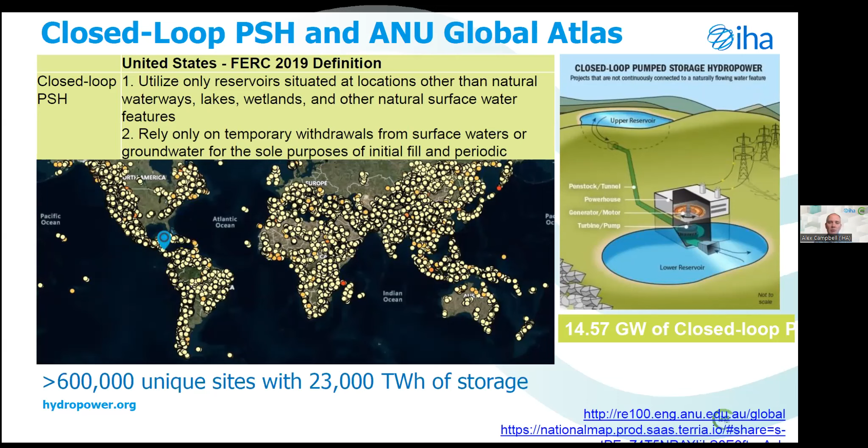Now, of course, in reality, not all of those sites would be viable, but it gives you a sense of the scale and the potential that is out there. And of course, pumped storage today is one of the most significant forms of storage on electricity grids, by our estimates over 90% at the moment. So it really goes to show that there is tremendous potential out there. Next slide, please, Rebecca.

We've got a pumped storage tracker tool on our website. If you're interested, you can go and look at most of the sites that are in operation and many that are under construction. That's easily searchable on our website, so please do go and take a look. We're on the brink of updating that as well to include some national policies information, but the tool is live and available at the moment in its current version. Next slide, please, Rebecca.

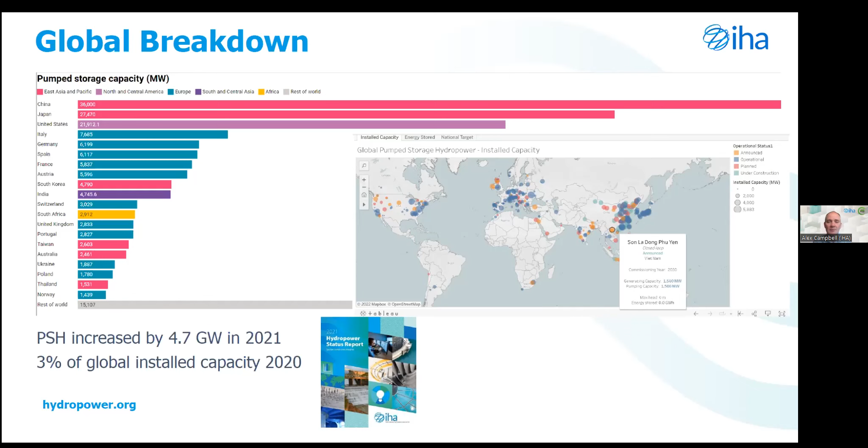So again, hopefully for most of you, this particular aspect won't be news. Electricity systems are changing around the world, and what we're seeing is a huge shift away from the generation like coal and gas, which is reliable. We know when it's going to happen. In the case of gas, it's super flexible. Coal, a bit less flexible, but you know when it's going to be on, and you can plan your electricity system accordingly. Of course, with net zero, with the imperative of climate change, we have to move away from that.

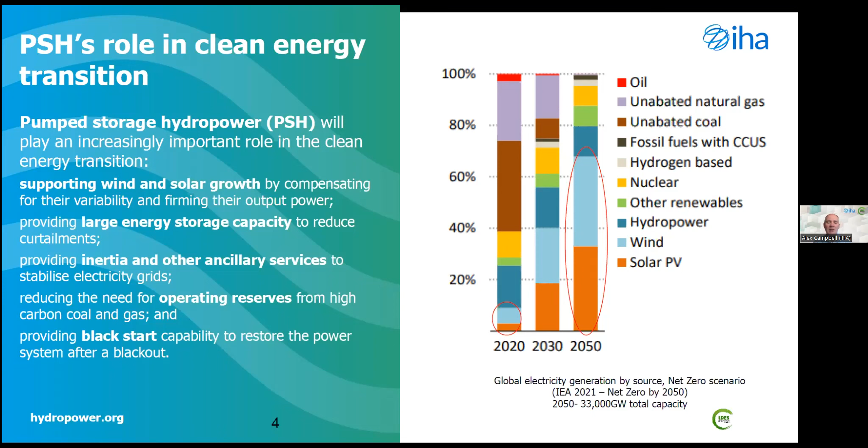So we need that system flexibility to make sure that the lights stay on, and indeed that electricity keeps flowing, and that we're not polluting the atmosphere with yet more carbon. Again, hopefully none of that is news to you guys. It's just a useful reminder of the sheer scale that we're having to deal with. Next slide, please, Rebecca.

So a question that we're often asked is, well, if there's obviously a compelling need, and if pumped storage has been around for a long time, why isn't it being built more at scale? So to answer that question, we brought together a wide range of stakeholders a couple of years ago to form the International Forum on Pumped Storage Hydropower. 80 plus stakeholders, government-led, IHA provided the secretariat, huge number of partners.

And we've themed our work around 3 key working groups: markets and policies, sustainability, and then capabilities, costs, and innovation. And we've got leads from all of those groups actually on the call later on today on the panel discussion. And I'll give a quick summary now of the headline findings from some of those groups.

So firstly, from policy and market frameworks, many of these findings will be applicable, of course, to other forms of technology too. So some of the key headlines there will include: make sure that you plan for your storage and flexibility needs now. We don't want to be in a position in 10, 20 years time where we've rolled out wind and solar at scale and then suddenly find it's difficult to keep the lights on without resorting to gas, for example.

And then I guess really crucially, the one that I always like to point to is we've got to make sure that services are remunerated, which quite often isn't the case, believe it or not. So not for electricity generation, but for some of those ancillary grid services. And many markets around the world still don't pay for them, reflecting the legacy infrastructure, as it were. But then also you've got to give long-term price visibility to investors.

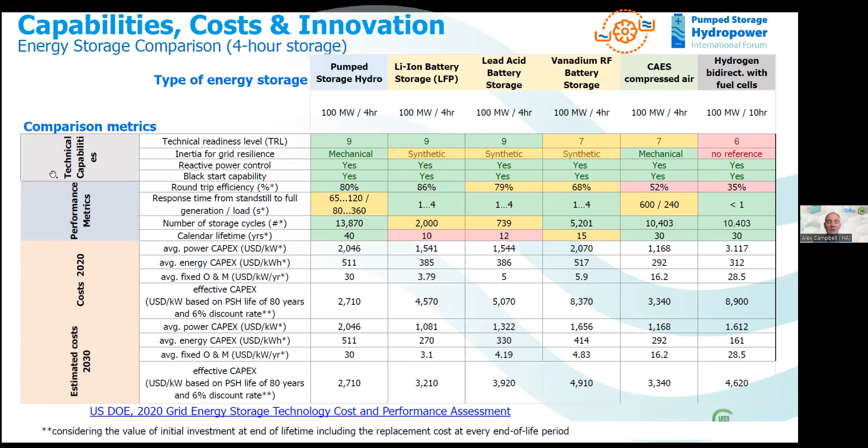And then I think this is the last one from me before handing over. Just a pointer to the XFlex Hydro initiative. So this is a European Union funded project. It's got a number of demonstrator projects, mostly pumped storage. There is some conventional hydropower in there, but it's really to showcase what needs to happen with assets like hydropower to enable that energy transition, to enable the integration of wind and solar onto grids more easily, more cost effectively.

The project is underway right now. There are demonstrators up and running, and it's going to complete next year, and there'll be major reports and recommendations published as part of that. And IHA is working with a wide range of partners on that to make sure that the findings are shared across the whole of the community. And again, I would suggest that the market recommendations are very, very applicable to a wide range of technologies, not just pumped storage.

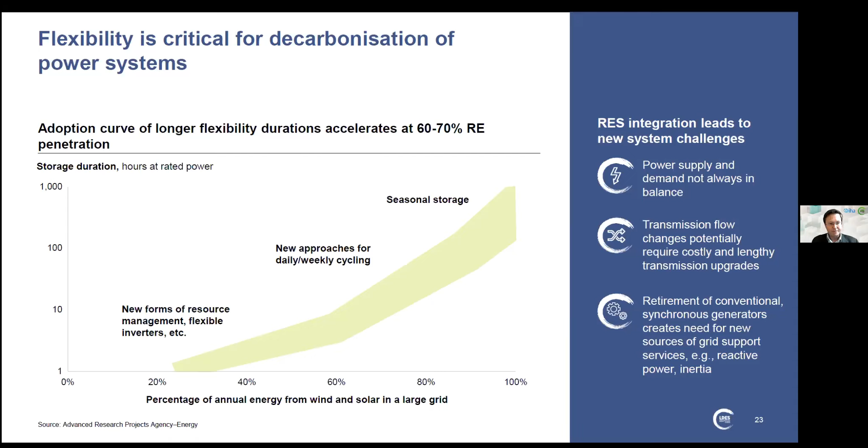The system flexibility we think of is not just power system flexibility, but it includes heat flexibility, hydrogen flexibility, and the sector coupling between power and hydrogen and power and heat. In our first report, we focused really on those technologies that provided power system flexibility, as well as the interaction with hydrogen production. The next report, which we're working on for COP27, goes much more in detail into the power to heat coupling. But today's focus is really on that power system flexibility, including costs, the amount of deployment of long duration energy storage, and the business cases from different customer perspectives. Next page.

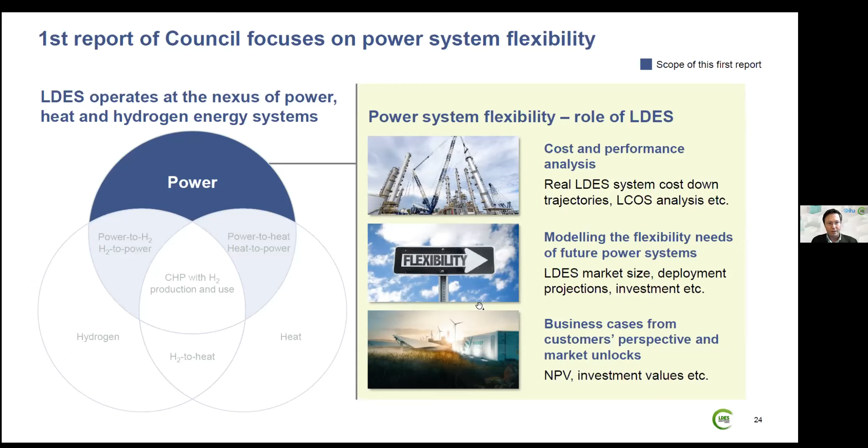How we model it is with something called the McKinsey Power Model. It includes all the different solar, wind, battery, hydrogen costs, also the transmission interconnection between regions. We have many different regions within, for example, the US or Europe. We also modeled Japan, Australia, India, so real good coverage of the global power system.

We then introduced into our traditional modeling long duration energy storage. We didn't have that in the past because, apart from pumped hydro and hydrogen and batteries, we didn't really have an asset class describing some of those more novel long duration energy storage. So we introduced the first quartile from a benchmark, which we did with all the members of the LDES Council, and then asked ourselves the question, what if you would have such an asset available? Would you see that being deployed?

We also constrained it to a net zero power system in developed countries in 2035 and net zero power systems in 2040 in developing countries. So by 2040, a net zero power system supporting a well below 2 degrees Celsius trajectory for decarbonization, as power needs to be about a decade ahead of the rest of the energy system.

Maybe a question on nuclear, which was asked in the chat. We have nuclear in our power model, and the answer that came out was not a nuclear heavy one. Of course, the inputs determine the outputs. We use the current traditional view of nuclear capital costs. If you do see a significant drop in capital and OPEX, for example, with SMRs, then of course you could see a different answer coming out of the modeling. But based on the modeling and the input assumptions we have for nuclear, we did not see it becoming a large scale economic deployed decision.

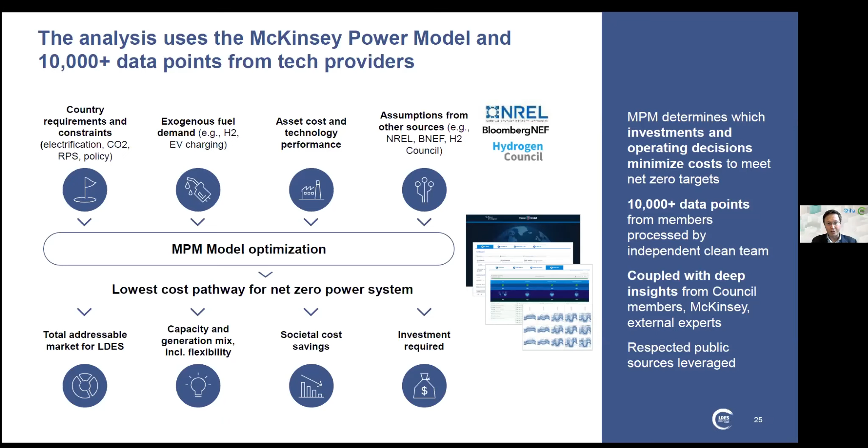Then on the two types of services, there's energy shifting services and grid services. Energy shifting services include taking daytime energy, putting it to night, or taking days where you have lots of wind and putting it to days that you don't have much wind. We determined two different archetypes in long duration. One is the intraday energy firming archetype. That takes energy in a 24-hour period, being able to make that renewable energy for a 24-hour period.

Then there's also the multi-day archetype, where it's a clean dispatchable capacity archetype. That multi-day, so 24 hours plus, quickly also becomes 3, 4, 5 days of duration in many locations. So you really see it playing almost a gas capacity role, but then a long duration energy capacity role. For the multi-week or seasonal durations, we see hydrogen still being the most effective low carbon technology.

We also looked at other technologies, for example, biogas, CCS, but we concluded on the bio side that there is really an uptake in industry or marine, and therefore question how much of that would then come through in the power sector. We can talk more. Again, inputs determine outputs, so we do know that the modeling is always sensitive to the constraints you put in.

On the grid services side, this is about the inertia provision, frequency ancillary services, or black start capabilities. Many of the LDES technologies, including pumped hydro, have those grid service capabilities. And as you remove gas and coal from the system, you'll start to need substitutes for those stability services.

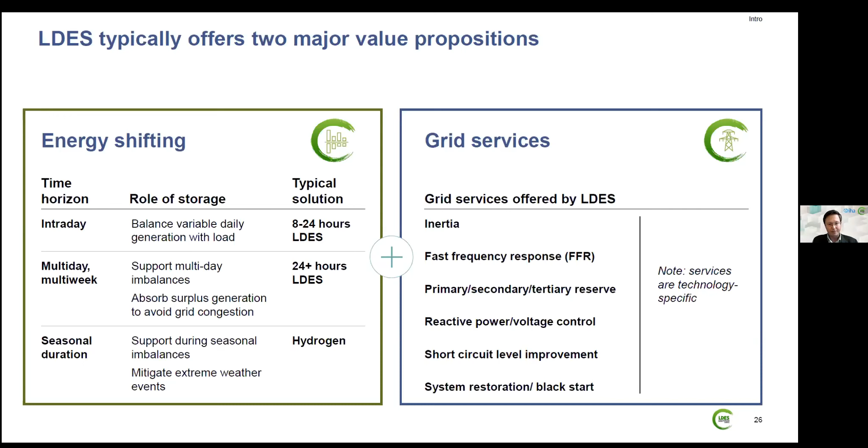Many use cases are unlocked by LDES, not just energy shifting and grid services. These include the firming of renewable PPAs, which Julia will talk about more, and the optimization of fixed infrastructure. We saw that half of the societal benefits of deploying storage is in the fixed infrastructure. So 50% in the reduction of fuel costs and capacity needs, and the other 50% of value in the increased utilization of transmission and distribution grids. Lastly, there are the remote grids or industrial grids in remote locations that can be supported by LDES.

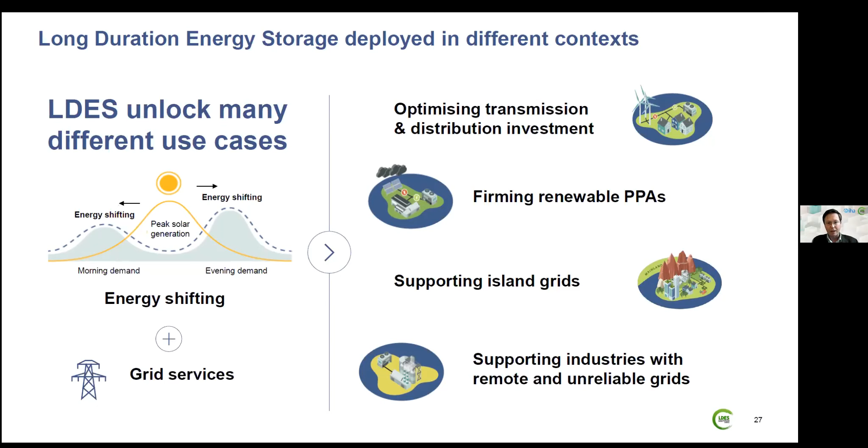We looked at all the different types of technologies, so not just the mechanical pumped hydro, but we introduced new chemical technologies, electrochemical technologies, and thermal technologies. By now, the LDES Council has 30 technologies across these categories, and we benchmark these technologies to understand their CapEx cost, their OPEX cost, their round trip efficiency. We then take the first quartile across the tech agnostic LDES benchmark to say, if this type of technology would exist, what would be the role of those technologies in a power system?

And again, it's really important to understand that we took first quartile outlooks. The reason we think first quartile outlooks are appropriate is that capital will flow into those technologies that really have the highest potential for low cost and high efficiencies. And therefore taking a median outlook from a benchmark may be underestimating the potential of these technologies in energy systems.

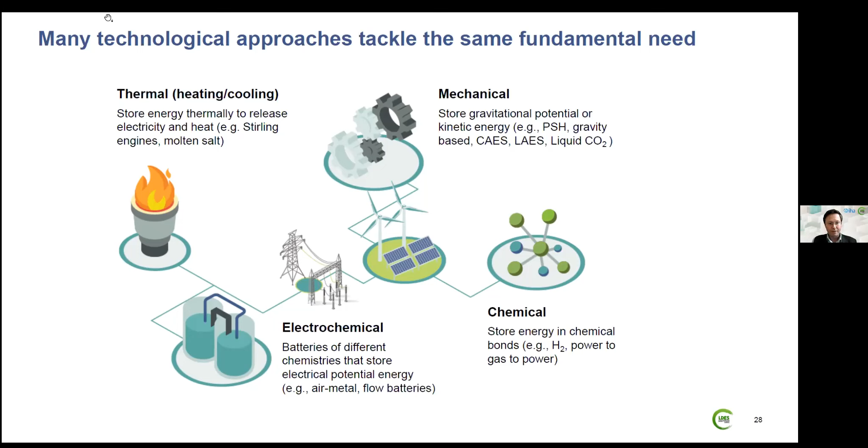So here are those cost outlooks. In our modeling, we see costs coming down by 55 to 60% per kilowatt hour of capital deployed. So we see it coming down, for example, for a 12-hour system from $120 per kilowatt hour to roughly $60 to $70 per kilowatt hour, again for a 12-hour system. You also see the capital cost here for a 36-hour system.

As I mentioned, there's these two archetypes. One is that intraday archetype, which is the blue, and the multi-day archetype, which is the green. You can see that the red shows the uptake of long duration energy storage over time. So this is the economic uptake based on our modeling, showing up to 400 gigawatts by 2030, 2.5 terawatts by 2040. So this is a $2 to $3 trillion opportunity in terms of capital deployment. Real significant ramp up beyond 2030 to get to fully decarbonized systems.

But even between now and 2030, we see an equivalent capacity deployed that we see in hydrogen for electrolyzers, for example, right? 400 gigawatts is already a substantial deployment in the next decade. Next page.

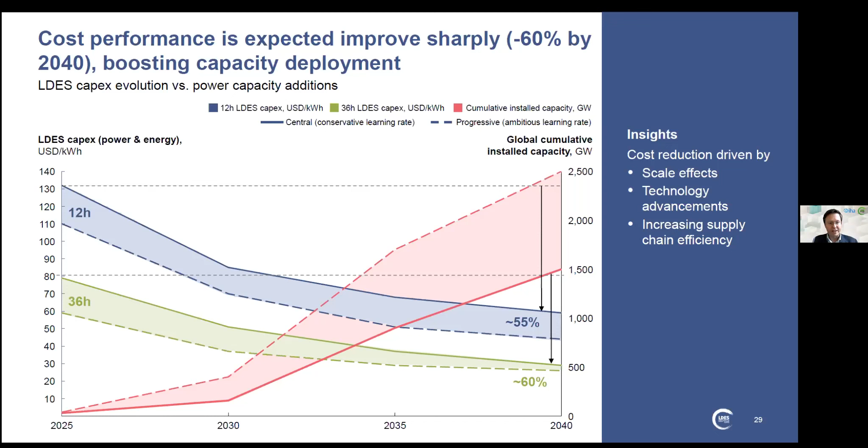So how does this long duration energy storage work in a power system? So here's an example of a trace of our modeling where you can see on the y-axis the state of charge, on the x-axis a full year, so January to December. We follow the storage systems over multiple weeks and months so that you can see the actual least cost deployment of storage in an energy system. This is in 2040 in the New York ISO, so in the US, a fully decarbonized New York ISO, where we have a 150-hour system, so roughly a 7-day duration system.

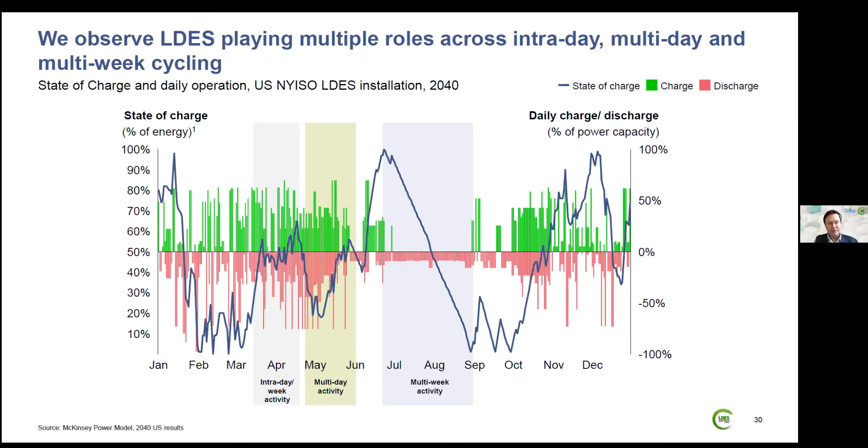The takeaway for this page is that the 7-day storage system doesn't just fulfill multi-day cycling, but it fulfills intraday cycling, multi-day cycling, and multi-week cycling. So you see that actually this is a versatile storage system that doesn't just fulfill a multi-day role. So the question then is, what is the role of lithium ion in the intraday if you start to have these long duration energy storage systems deployed as well? Next page.

What we see over time as the system goes towards zero carbon is that the duration of systems becomes higher and higher, right? So in the first decade, 80% of systems are intraday firming, while in the second and third decade, we see the durations increasing to multi-day systems. So 80% of all of the energy storage deployed in 2040 is in multi-day energy storage systems, while about 50-50 of the capital is spent in the intraday and the multi-day. Next page.

It's a global phenomenon. So we, as mentioned, modeled a number of regions. You can see that the outcome in each region is a bit different. So for example, Chile and Australia have on average lower duration systems than the US or Europe. You can see that by 2030, we see durations increasing to roughly 30 hours in the US and Europe. We see durations increasing to almost 100 hours in those systems by 2040 on average, while in Australia and Chile, we see durations up to roughly 24 hours. Next page.

How does this then look? We have on the left-hand side a modeled system without LDES. So we did the McKinsey Power Model, and we didn't include LDES as an archetype. While on the right-hand system, we introduced the first quartile of long-duration energy storage from our benchmarking.

And you can see on the left-hand side, hydrogen turbines and lithium-ion batteries fulfilling a significant role in flexibility to integrate solar or wind. On the right-hand side, you see long-duration energy storage technologies, again, tech agnostic based on that first quartile. That reduces lithium ion by roughly 70% and hydrogen turbines by roughly 60%. So you can see the bridge of long duration energy storage between lithium ion and hydrogen. Maybe I'll talk you a bit through those cost dynamics and then hand back over to Julia.

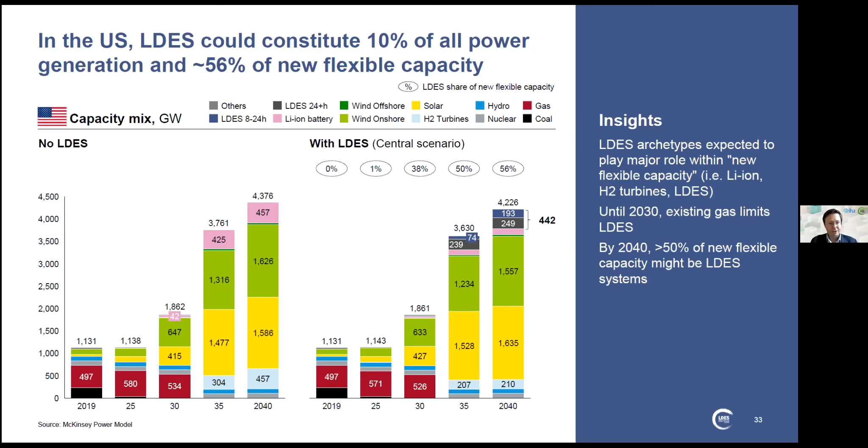Next page. So when we look at costs, all of the costs of energy storage in the numerator and all of the discharged electricity in the denominator, that gets you to an equivalent cost to generate electricity with a storage system, similar to an LCOE metric for solar or wind.

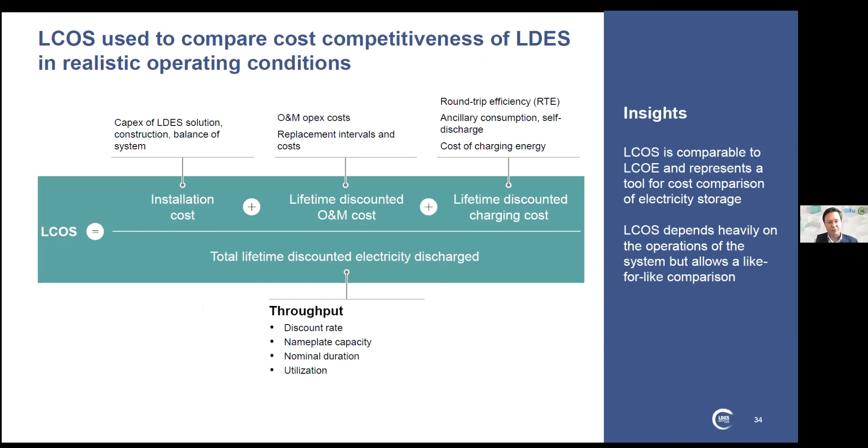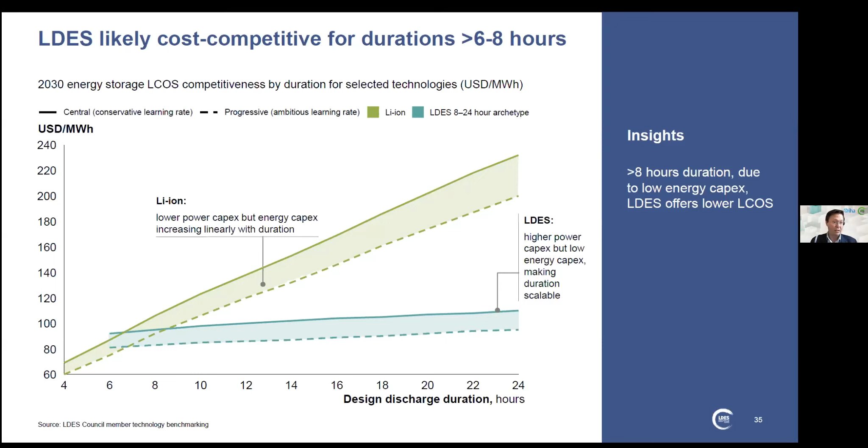Next page. So how does that then look as you increase the duration beyond 8 hours? You can see the lithium ion costs going up because the more battery packs you add, the higher the levelized cost of storage becomes. Well, because the energy storage costs of LDES systems are much lower than the energy storage costs of lithium ion per kilowatt hour added, you see that the slope of LDES is much lower, and there's this competitive band now, where LDES beyond 8 hours is significantly competitive versus lithium ion deployment beyond 8 hours. Next page.

So then on the hydrogen side, if we increase the duration beyond 24 hours to 150 hours or more, you can see that hydrogen at roughly $1.50 per kilogram has an LCOS of roughly $220 per megawatt hour, or the equivalent cost to generate with a hydrogen turbine would be about $220 per megawatt hour. That would be similar to a long duration energy storage system of 150 to 200 hours duration.

So you start to see that up to 150 hours of duration, for hydrogen costs above $1 per kilogram, you see long duration energy storage being competitive to hydrogen for roughly 1 week cycling.

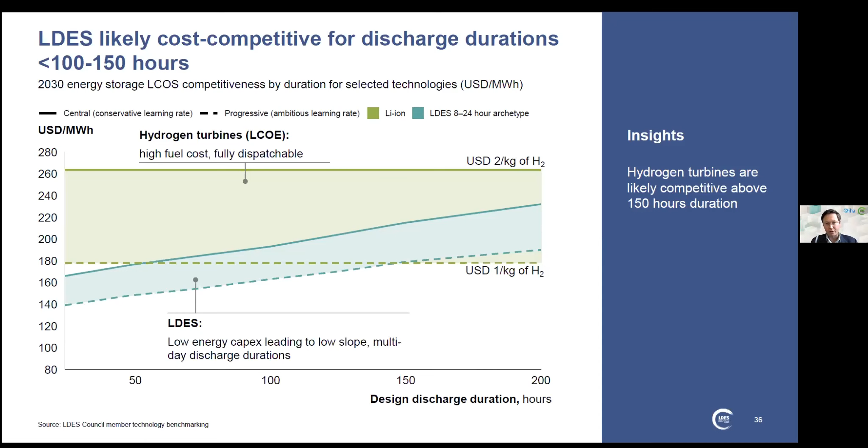Next page. Just to end it, the report itself, again, 80 pages for you to read through, includes the business cases from different customer perspectives, including developers, integrated utilities, mines, islands, and for each of these different archetypes, different value drivers are available, whether it's firming, capacity, energy arbitrage, CO2 saving. So each of these are available to different stakeholders.

In our regulatory report, policy options, that will be published, we'll be looking at these value drivers in much more detail. Takeaway is that not every market design supports monetization of storage benefits. And as you try to de-risk or at least create opportunities to have NPV positive business cases, you need to increase the number of value drivers available to these users of energy storage.

So with that, thanks for this. And Julia will talk us through more of the 24/7 clean PPAs.

Thanks, Hodart. And as you were just mentioning about de-risking, I think the 24/7 PPAs are a great project to de-risk projects for investment and developers, and they provide a reliable revenue stream. So if we can go to the next slide, please. What's also great today is to work in collaboration on the importance of education outreach, because so much is moving so fast. It's really important to see there's so much data available to start influencing various policies and tools.

So we'll go over what is a 24/7 clean PPA, what is a quality assessment framework, making sure that this is something that works well and is transparent and the criteria is understood, looking at the difference between corporate and system level emissions impacts, and then what is a path forward for implementation.

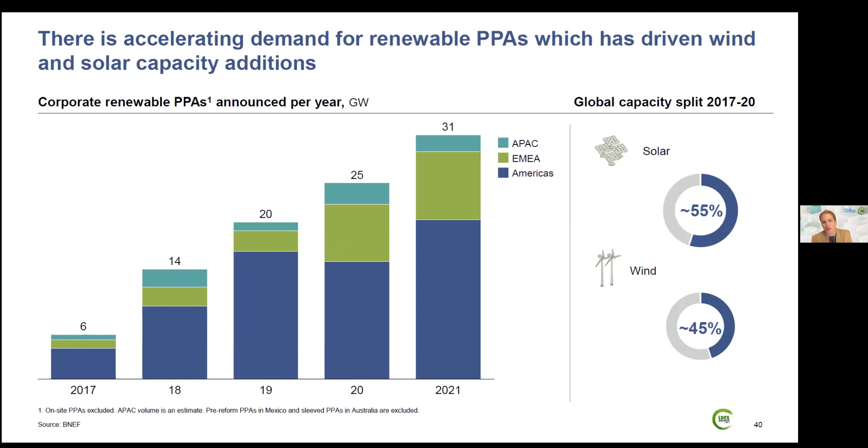So it's really exciting to see that we've already made a lot of advancement, and we can build upon this know-how to really bring in the additional benefits of a 24/7 clean PPA. Next slide, please. Thanks, Rebecca.

So what we noticed, and why it was so important for our members to get together to really dig into an additional solution, was to look at 24/7 clean PPAs filling in these gaps. So if you're looking at a day where you already have the PPA, you're still meeting some of the hours with fossil fuels traditionally, because you don't have wind or sun online.

So we realized that if you truly want to have a 100% emission-free grid and you want to have renewables on 24/7, then we need a tool to really promote this. And so we're trying to capture every hour of every day with the 24/7 clean PPA, and then demonstrating the value add of long duration energy storage filling in these gaps.

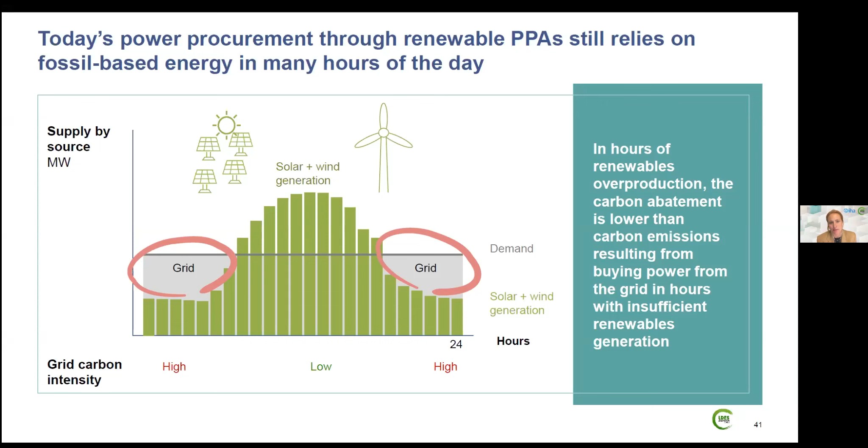Next slide. So as we do this, we're really trying to do hourly time matching. So if you're looking at renewables generating, and maybe it's either overproduced or underpowered, you want to make sure that storage can come on and hold it for multi-day, seasonal. And then you can look at bringing the clean energy provided by long duration storage back to the grid, so we can have that every hour of every day match.

So then you don't have the emissions increase because you're having those gaps. Instead, you have a very clean 24/7, every hour, measured by the emissions reducing and the fact that you actually have clean energy powering the grid.

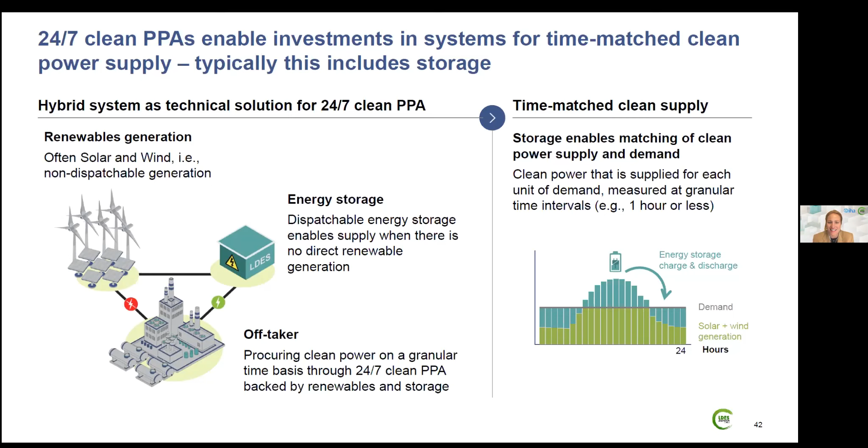Next slide. So when we were starting to talk about how do we make this come to fruition, what are the barriers we need to overcome? What's preventing this? Cost is one of the number one items. And so right now cost might be higher, but as technology improves, the diversity of long duration comes on the market, and we scale up, costs will decline.

The second point was also about carbon accounting incentives. How are we looking at different protocols for greenhouse gas emission protocols? And is it truly understood and transparent? And then as we're trying to scale up, are we having the flexible technologies that are provided?

Are we looking at the diversity of long duration energy storage and the new innovations that are happening within pumped hydro, for example? And then how do we make sure that we have a global accountability setup so that we can look at certificates, maybe an award system, and highlight something of gold, silver, platinum, just different targets to meet so that you can have the metrics met and understood, and then you're having that resolution that's understood by all.

And then also, as you're doing this, creating the standardization of the clean PPA and getting the quality so that you are ensuring that you are getting the emissions reductions, and it's not just staying at a level of 60 to 70%, you're actually meeting the 80, 90, 100% emissions reductions.

Next slide, please. So when we're doing this, it's also building upon all the great work that we did with McKinsey and the members, and the first report showing the value add of levelized cost of electricity and levelized cost of storage, and how to bring together the analysis of CapEx, looking at the cost and the curves that you saw earlier in Hodard's presentation about the value add at that sweet spot with 80% emissions reduction and long duration energy storage coming on, the 8 hours plus, the value of long duration energy storage and the cost coming down.

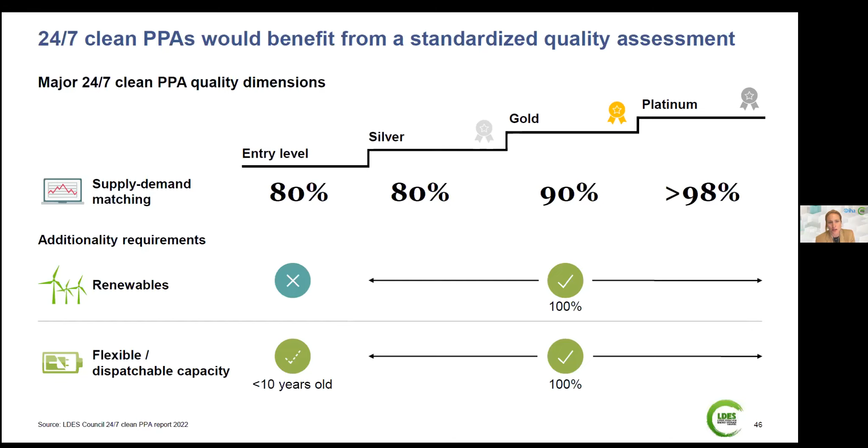You're demonstrating that you have 100% renewables online 24/7, and you're giving that flexibility that we've all highlighted is so critical to a clean energy grid that's truly performing well and giving the reliable services that we all need. And so this assessment that we put forward has a lot of benefits to accountability, transparency, and an understood across the board metric system that we can use to promote the enormous value of 24/7 clean PPAs. Next slide, please.

You can see, as mentioned earlier, the significant cost savings with having 24/7, each hour met with the supply and demand of clean energy. So again, being able to provide that for a multitude of hours and the seasonal benefits that are so critical.

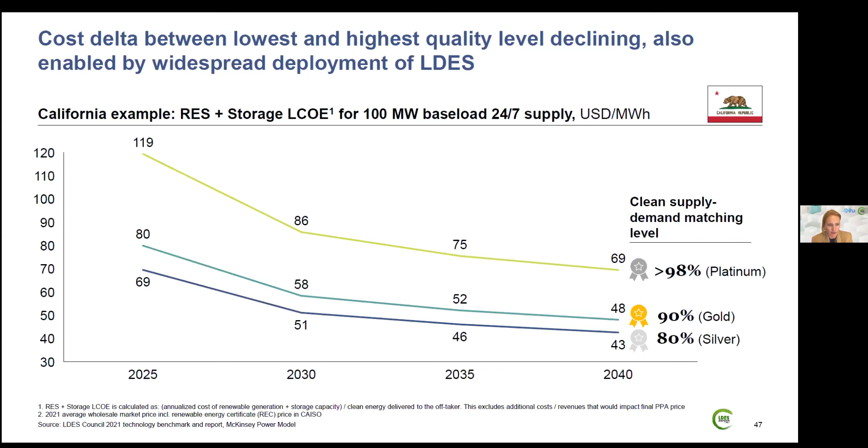Next slide, please. And one other element that I've been highlighting is that we need to be able to track, and we have that accreditation system that will help. We really want to validate that we are really reducing emissions. From the existing average today, and from a solar PPA to a wind PPA, you can get to 40 to 70% emissions. But if you really want to get to full decarbonization and meet our net zero targets, we need to get to 100. And so what does that look like?

And then using the system of the known certificates of silver, gold, and platinum to really start bringing down costs and also bring down emissions. So again, the value of long duration energy storage, providing this matching service to really meet and provide grid stability and flexibility. Next slide, please.

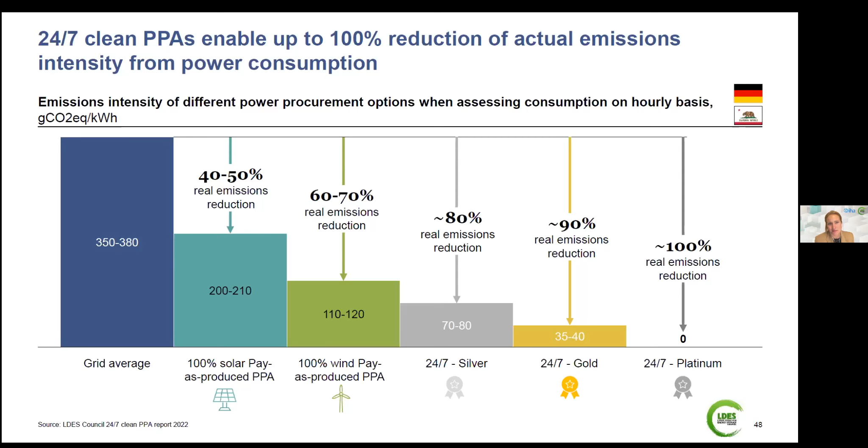So another aspect too, looking at the different modeling and different components, really showing that this isn't just checking the first initial boxes. We're looking at the entire portfolio aggregation, looking at the variability of renewable energy systems, looking at the weather patterns and what's been changing in the intensity of weather, looking at the location, as mentioned. Not every project can fit in a variety of different geographies.

And so again, noting the diversity of long duration energy storage and some of the new innovations in pumped hydro, for example, that give you some additional flexibility. And again, just the supply and demand correlation for justifying the need for storage and looking at the overall CapEx and cost equations. And so, as we mentioned earlier, we need this whole pie to be increased so that we can all make sure that we're participating to bring down costs, but also looking at what happens with lithium ion in partnership with long duration.

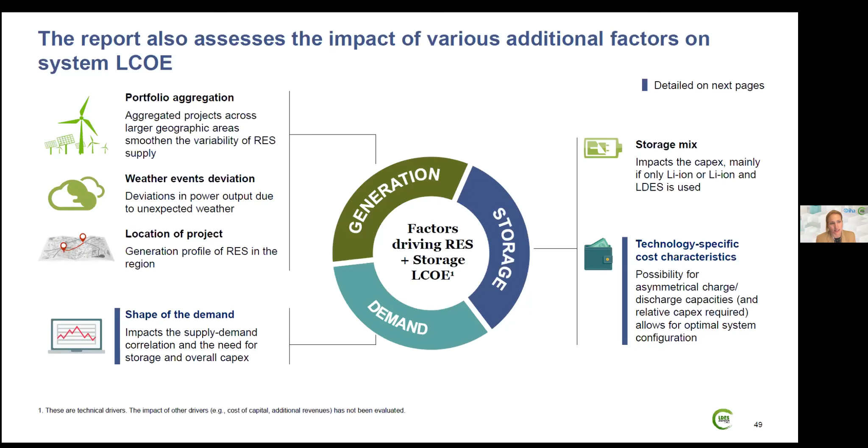And then also looking at the different cost characteristics for each type of technology, trying to promote all the different avenues, but again, looking at the different metrics for the diversity added. Next slide, please.

So what's also really exciting is that this isn't just for one type of customer. There is so much opportunity here to build on the existing current PPA system and then evolving it into the clean PPAs, where buyers can take it, a huge element that can really help in procurement efforts, making sure that you're justifying and validating emissions reduction targets. There's a bunch of different ways then to move from silver to platinum and really promoting that to meet your sustainability goals.

As a clean PPA seller, really making sure that you're promoting how you're truly decarbonizing power supply, looking at the diversity of technologies and products that are available to you, and then looking at how long-duration energy storage provides the flexibility, especially in capital allocation, showing again that cost curve where after 8 hours, you have long-duration energy storage providing that stability and the cost reduction.

And then also just really seeing the entire ecosystem that we're really trying to build with education outreach, promoting these different tools that we can use to give you the flexibility. It's really exciting to see that there are new mechanisms to really account for and be known and transparent for carbon accounting. And again, the quality standards that come with this, for the justification.

So we're not greenwashing, but we're actually demonstrating the value add of the tools in the toolkit, so we can demonstrate that long-duration energy storage, working with one of many tools, 24/7 clean PPAs, can help us decarbonize our global economies. Next slide, please.